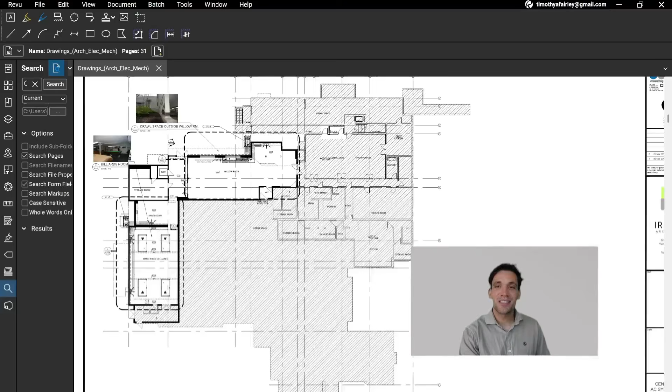Every day, people ask me about AI quantity takeoff tools, and I always have the same response. I refer them to the clock benchmark. It's an absolutely fascinating study that evaluates different large language models' ability to read analog clocks, a task that is trivial for most people. Again, much simpler than trying to go through these drawings and measure how much ductwork you

need. So the human baseline is 90.7% accuracy, which I guess is a little bit surprising that it's not 100%, but I'll be fair. The top AI models, and again, this has jumped massively in probably the last week with GPT 5.4 high. The top AI model scores 50% accuracy at reading simple analog clocks. Most of the recent models, like Claude Opus 4.6, score less than 10% at doing this. Gemini 3.1 Pro was previously the best, and what I've been using for analyzing construction drawings, scores 32.2%.

So I think this is absolutely fascinating that looking at clock faces like this is actually a very complicated task for AI models. So while these models are good at maths, reasoning, logic, language, they actually really struggle with simple visual tasks. And I think it's a really interesting benchmark because it shows us quite a difference in looking at a drawing and being able to say, this is a construction drawing, or even this is an architectural layout of a building, versus being able to look at a precise section of the drawing, refer to a scale, and take a scaled measurement from a drawing.

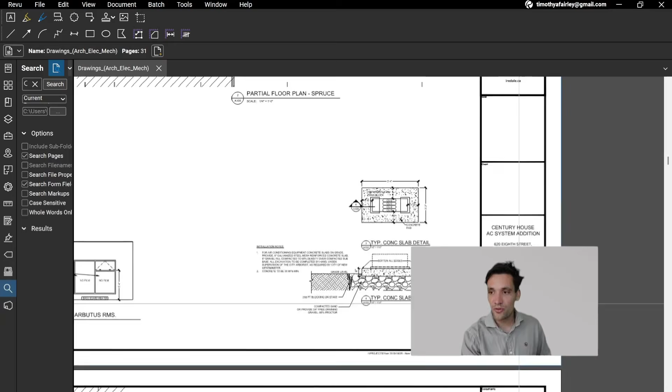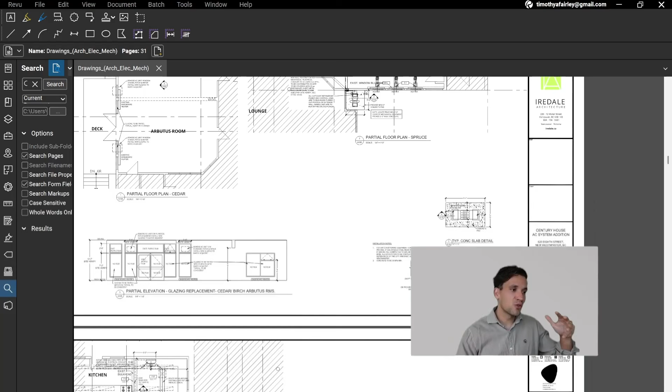They're very different tasks. Again, intuitive for us, but because of the way these models process visual data, it's actually very difficult to get large language models to do tasks like this accurately. So is AI useless for quantity takeoffs? Well, not necessarily, but in this video, I'm going to really break it down into two parts. If you want to use large language models like ChatGPT, Claude, or Gemini to do a quantity takeoff, I'm going to talk about a workflow you can build to do this more accurately. And then the second part of this is I'm going to explain where I think it actually makes sense within a quantity takeoff workflow to use large language models.

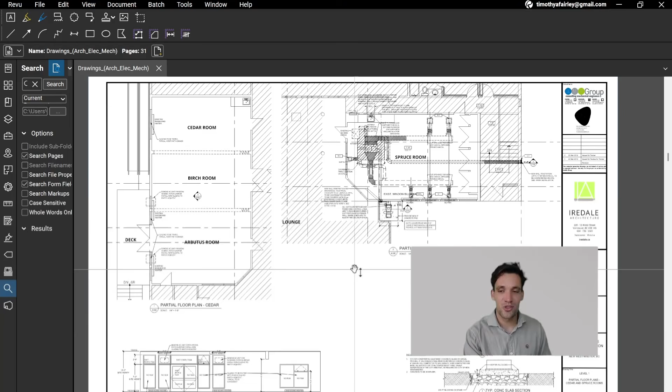And there are quite a few AI tools out there for quantity takeoffs. I've seen probably several that are quite famous, but the pricing I have seen for these tools is astronomically high, and none of them claim to be 100% accurate. So if your goal is to take a set of drawings and to spit out a bill of quantities in your exact format, the best way to do this is to outsource the task to somebody in the Philippines. But the AI quantity takeoff software that I've seen are often way more expensive than using an outsourcing platform like Fiverr and Upwork, and they are less accurate.

So if that is your goal, I don't think AI is the tool for you, but as I'm going to talk about in part 2 of this video, I think there are some applications where it makes sense to use a large language model, particularly Google Gemini's model, to support you in a quantity takeoff process. Okay, so part 1, I'm going to talk about how to get the most out of tools like Gemini and ChatGPT to more accurately read drawings.

And the model I'm going to be mainly speaking about is Google's Gemini because it has the best visual reasoning. So again, you can use the clock benchmark to do this, but there are some better visual reasoning benchmarks, and you can just Google them and make the judgment for yourself. But Gemini 3.1 Pro is overall the best at visual reasoning. I'm not 100% sure why GPT 5.4 is such an outlier on the clock benchmark, but if you're talking about overall visual reasoning, Gemini 3.1 Pro is broadly agreed to be the best model.

But to understand how AI processes a set of drawings, we need to understand what happens when we open a new chat on something like Claude and we upload a set of plans to it. So when we look at PDF data, there's really two layers to it.

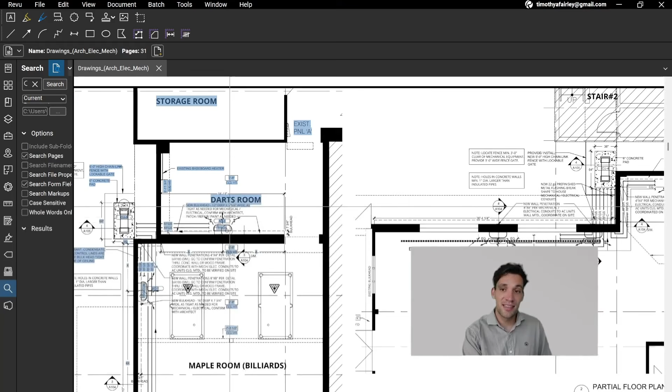There is vector data. So vector data is the actual text, the text on the drawings, the representation of these different lines, these symbols, that is encoded in a layer which is referred to as vector data. So vector data will tell the PDF processor, for example, I'm using Bluebeam Revu to do this, to draw a box at these coordinates.

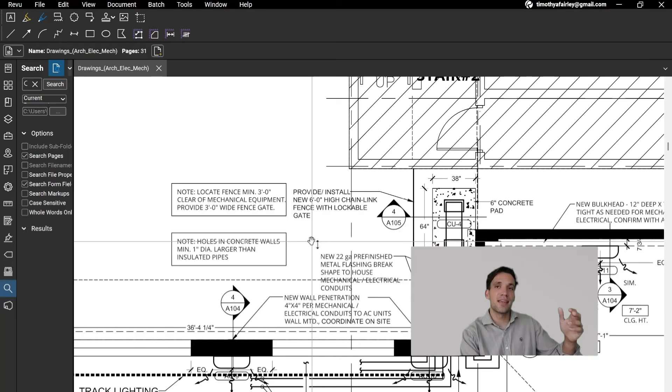So all these PDF drawings are broken up into coordinate systems, and that is how they basically process a big set of code, and that set of code will say, draw a set of drawings at this size with these dimensions, or do X, Y, Z. That is the vector data on the PDF.

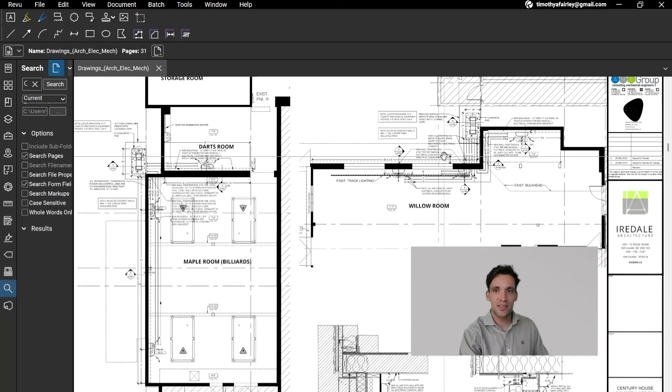So what actually happens when these models process a set of drawings is they extract all this data, they look at that vector data, and in parallel, they convert these PDFs to images to help to understand them. But because these models can't process this whole image at once, they break these down into tiles. So they might take a set of drawings like this and it might get broken down into a couple of smaller images referred to as tiles.

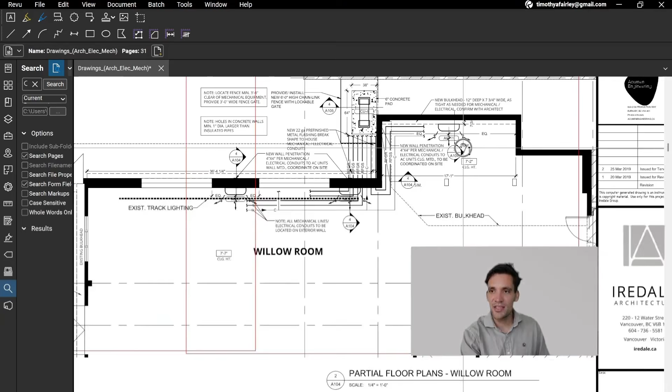And each of these tiles will have an overlap like this. So this saves processing power for the large language model, and it also helps it to more accurately understand. So each time the model looks at the drawings, all it's doing is looking at a snapshot like this, and it'll generally compress it a little bit so you won't be getting the full pixels. So this is like an 8 megabyte PDF plan. The large language models, to be able to process it properly, will usually process it in less pixels than what you can look at in a PDF reader.

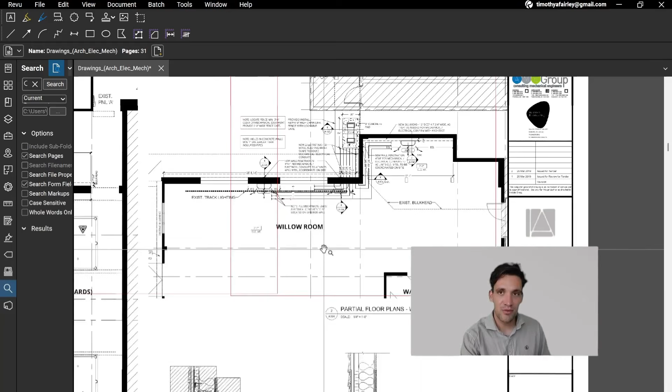Okay, so to use AI to process drawings and eventually do construction quantity takeoffs, the first thing we need to decide on is the model we want to use. So again, if we go back to this visual benchmark, Gemini is the best model for visual accuracy. So Gemini is the model we want to use. And then basically we're going to build some features around Gemini to do this.

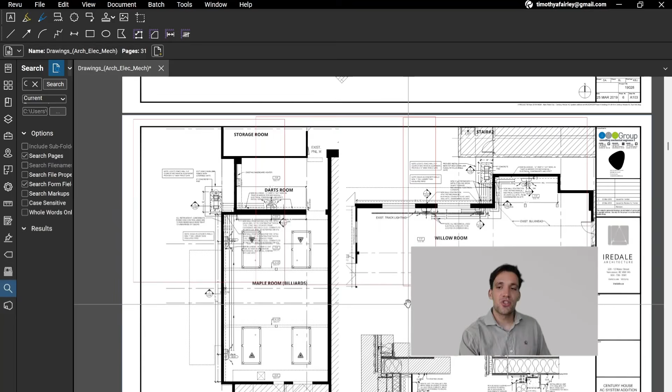So you can use Gemini within the chat interface like this, but realistically you can't customize it a ton. All you can pretty much do in the chat interface is upload your drawings, and you can give it some instructions, like you could prompt it specifically how you want to do your takeoff, but you can't really do much else on top of that within the chat.

Okay, so instead of using Gemini through the chat interface, which again, we're limited by what we can do, we're gonna use Gemini through Google's Antigravity, which is a coding environment, but it's just an app you download and you can basically run Google Gemini within. And instead of copying in context as you do it, you choose to open it in a folder on your desktop. So I've opened it in this example folder that has a set of construction drawings, and you can see on the left-hand side the file explorer, which lists out all the folders and files within that folder. The actual use of Antigravity is the exact same way you use Gemini.

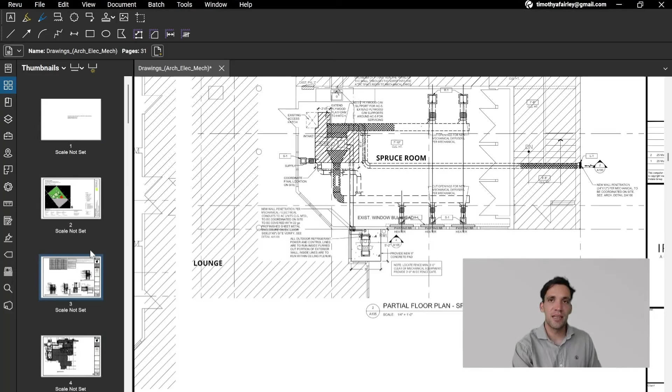You just type instructions and run them, but the difference here is that Gemini can write code that it runs itself later on. So this is really powerful when we want to do a task like splitting a set of PDF documents into 40 individual files and then processing each one individually. That isn't a task you actually need AI for. That is a task that you need code to run, and the code will split the PDFs. It's just a deterministic process. So it's much more efficient and much more effective to use AI to write code when you're setting it up, and then all you're doing is running that code.

So what I have done is in this folder, utils, I have the code that I'm going to explain. Basically to write this code, all I've done is prompt Gemini: please create code to split PDFs into individual drawings, or please write code to extract PDF data. And these coding agents are so good, they'll just do it for you.

The first thing I did is I instructed Gemini that I'm building an agent that performs construction quantity takeoffs. The first thing I want you to do is set up a Python script that splits PDF data. This works much more effectively than sending all my PDF drawings at once to Gemini, because these models have a limited context window, so if they process each drawing by drawing, they'll be much more accurate than if they try to process 40 drawings at once.

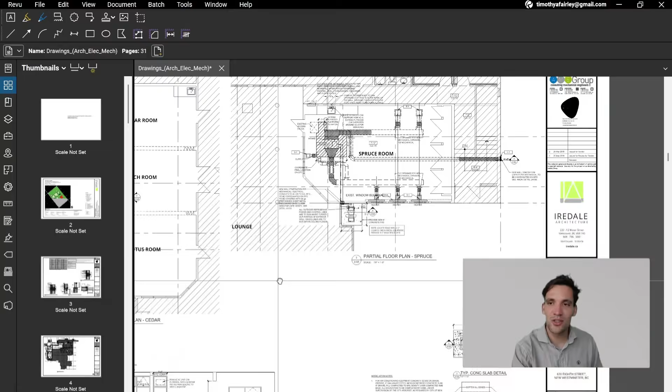The next thing I did is, when it extracts the vector data, I prompted it to create a script that decreases the size of each tile on the PDF — not decreasing the physical size on the drawing, but increasing the resolution. So instead of just breaking the drawing up into big tiles with low resolution, I've instructed it to write a script that breaks it up into lots of high resolution tiles. It's going to use more tokens to analyze this, but it's going to be able to do so more accurately.

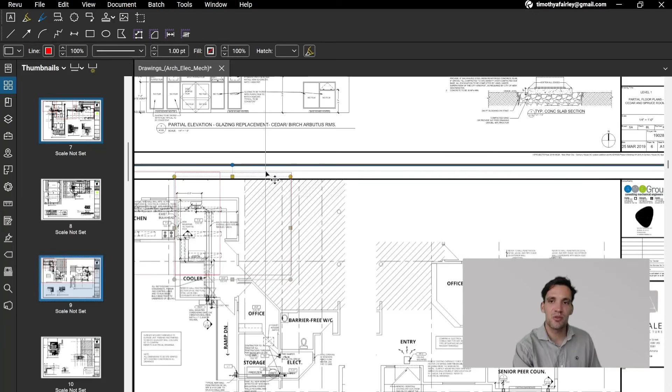And then the next part of this is to write a script that actually extracts all of the vector data from the PDF — all of that layer of text, symbols, and visual representations.

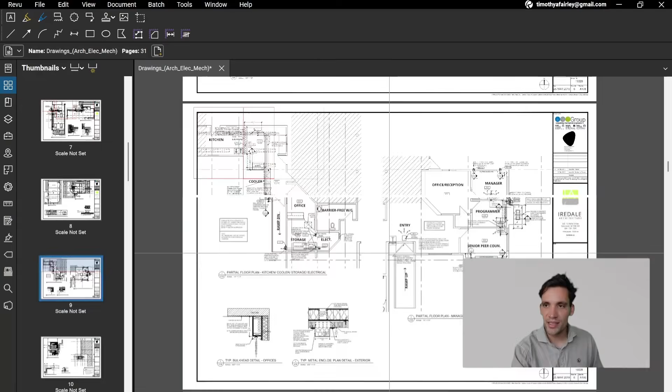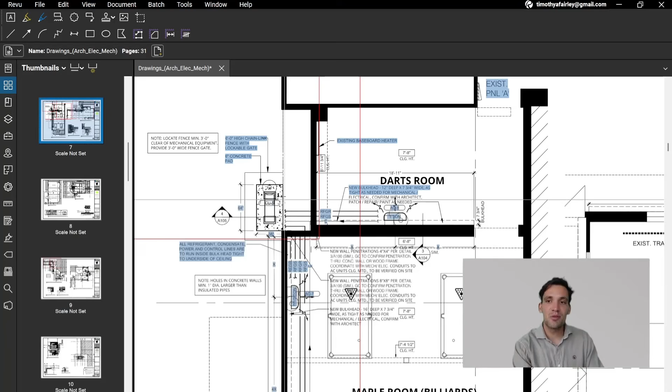The reason we want to do this, I'll talk about when designing the prompt, but where possible, if we're counting symbols on a drawing — for example counting split system units — if we go to the layout plans and there's a split system with a tag on it, CU5, once it extracts the vector data from the PDF, there will be a whole series of CU5s referenced in that data. Because that vector data is effectively just a big blob of text, AI is going to be able to count the representations of CU5 very accurately.

Then the final part of this is the actual workflow, which again I instructed AI on how I wanted it to do quantity takeoffs — this is the system prompt that's injected each time I say perform a quantity takeoff, describing what it's going to be doing. It says those utility scripts, it decides when to run them, so we're using AI to decide when to run those scripts. There are some principles: never use AI vision when you can count tags or use the actual vector data, first extract the primary quantities then the secondary quantities, go through one drawing at a time, state your confidence level for every item it returns, and then the user verifies it.

This is then broken down into a workflow: step one, it scans and suggests what items it should do a takeoff for, given a desired output format. Step two, once it's decided what items it's going to perform a quantity takeoff for, it goes ahead and executes the plan.

Then all I have to do to trigger this workflow, in the same folder, is say: you have access to a set of construction drawings, please complete a quantity takeoff using my workflow. It is then going to read this workflow and follow this plan.

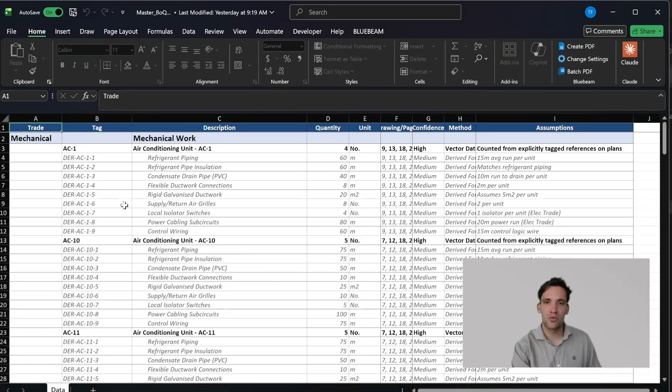The first thing it returned to me is the implementation plan with a recommendation of what quantities to record. Then it actually went through and did the quantity takeoff, returning this bill of quantities from the drawings. I'd already specified the output format and structure in those system instructions, and it's gone ahead and given us our primary quantities — it counted 4 instances of AC1 — and then given a secondary bill of quantities derived from these.

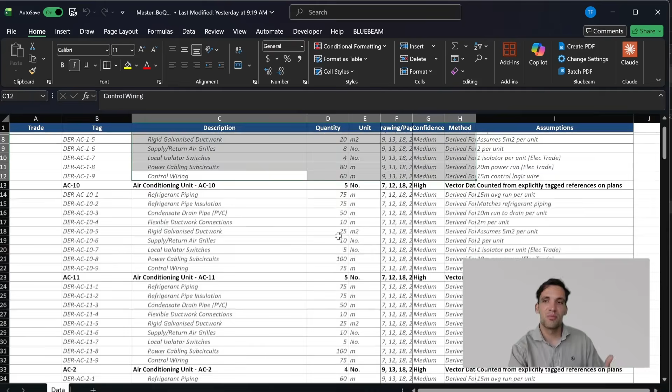Now, again, these tools, when you first use them, they're not going to be very good, but you just have to iterate and get it to improve, explain what mistakes it's making, and get it to go back and fix itself, which is really the power of this sort of stuff.

So long story short, the reason you should use tools like Anti-Gravity for things like quantity takeoffs is because the AI, the Gemini 3 model we're using, is the brain. The tools are then the hands that get allocated to execute the task.

So it knows we want to do a quantity takeoff. It reads the workflow file. It says the first thing I need to do is review the drawings and understand what quantities it needs to extract. It needs to split the PDF documents to do this. It looks at each individual drawing, comes back with a plan of what quantities it's going to extract. Then it breaks the PDFs down further into individual tiles once we agree on what it's going to extract, and then completes the workflow and writes it to an Excel file with my full bill of quantities after.

So the reason I'm so skeptical of AI quantity takeoff tools is because once you actually have a set of drawings and you've worked out what you're going to measure, the time it actually takes to go through and count light fittings, measure stuff, it just genuinely isn't that long. Like, this is me flying through and doing it now.

I just don't think there's the opportunity for time saving that people really think there is. If it is a massive task for you, if it is something that takes a ton of time, then my recommendation would be to outsource it. I just think AI quantity takeoff tools don't offer the time savings or benefits that people think they do.

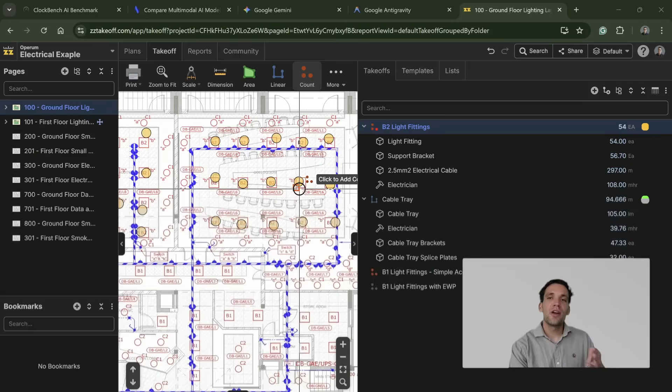Now, where I do think there is potentially a use case for tools like this is, number one, conceptual estimating. So say you first get the set of bid documents and you want to create a high level order of magnitude price. You're not too concerned if AI misses a quantity here or there, then I can see how running a workflow like this would save a lot of time in preparing that initial budget price.

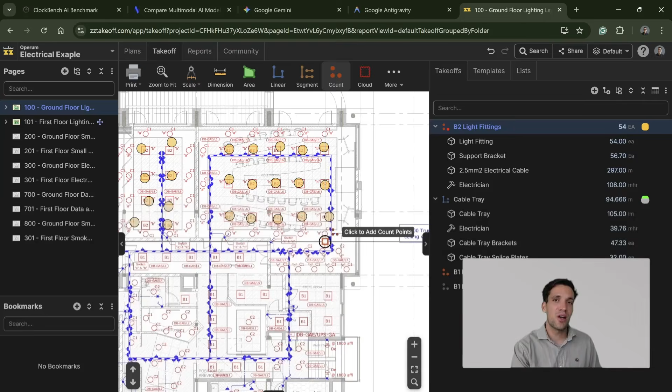The second use case I see with tools like this is, rather than getting it to do the actual detailed counts, you're using it to come up with the list of items you need to measure from your drawing. Often, one of the most time-consuming parts of a quantity takeoff is actually going through the drawings and working out what are all the different things I need to measure. Like, there's a ton of different light fittings on this, each drawing has different items, you can just use some simple strategy.

And again, this could be quite good in Anti-Gravity, where you upload a set of construction plans and then it goes through and reads the plans and comes back with a list of items you need to measure. You could then import that in. You could even get it to set up the actual secondary assemblies based on some existing data you have, and then generate this list of assemblies that you import into your takeoff tool.

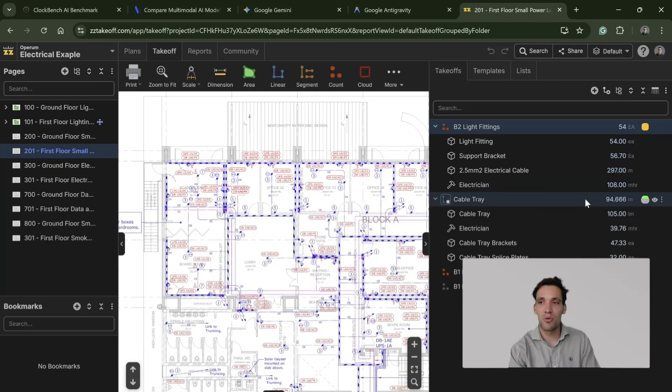Then once it's imported into your takeoff tool, all you're literally doing is going and doing the actual measurements, which, being honest, just doesn't take that long.

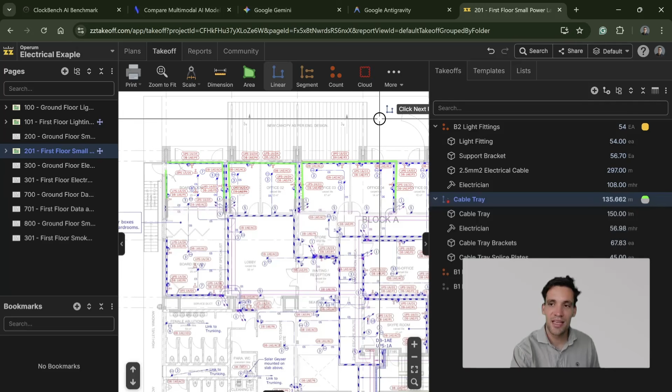Then the final step in this process is you could use AI to actually cross-check your quantities. So say I measure my bill of quantities here, I give my outputs and the drawings to AI, and I get it to cross-check to see if I've made any errors. Again, we're not relying on AI, we're just using it as an error checking tool.